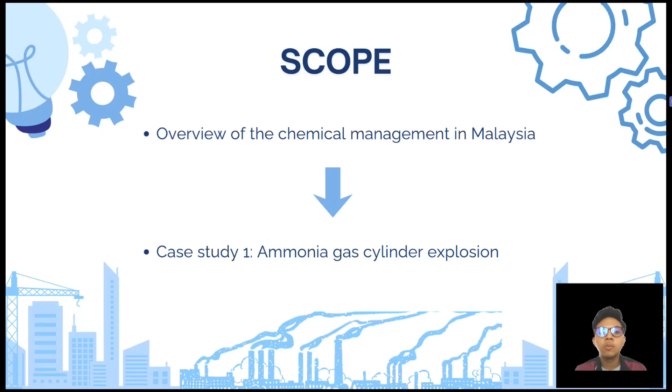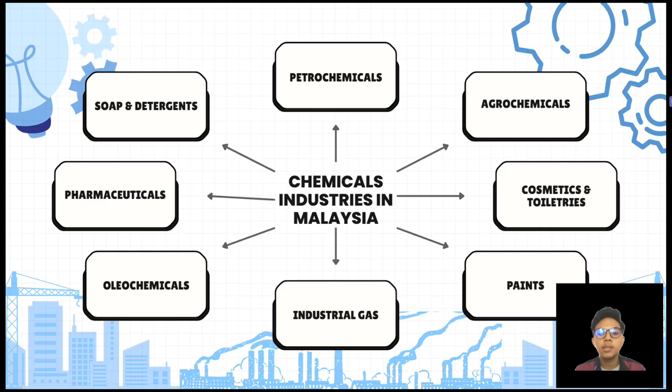This is our scope of case study: ammonia gas cylinder explosion. There are 8 chemical industries in Malaysia. The 5th point is our incident. It's an industrial gas. Case study 1.

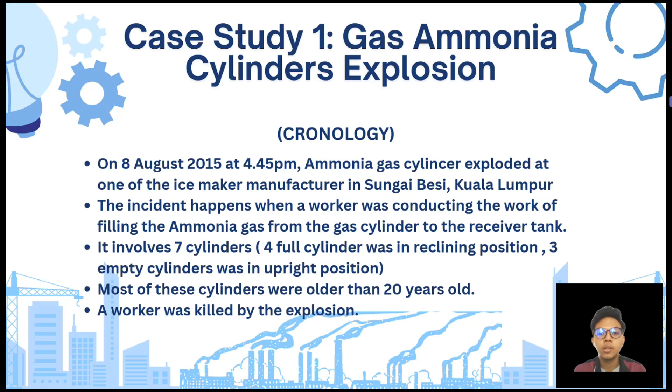Gas ammonia cylinder explosion, the chronology: On 8 August 2015 at 4:45 p.m, an ammonia gas cylinder exploded at Sungai Besi, Kuala Lumpur, Malaysia. It involved 7 cylinders, 4 of which were in a reclining position. Most of the cylinders were older than 20 years old, meaning they were expired. A worker was killed by the explosion.

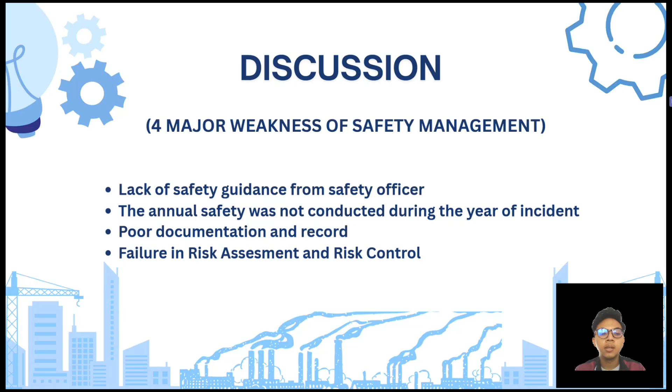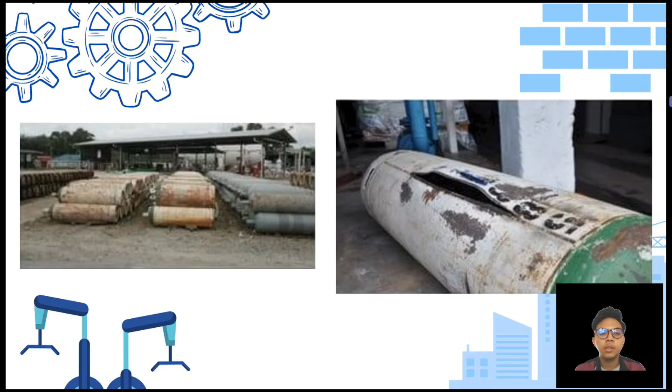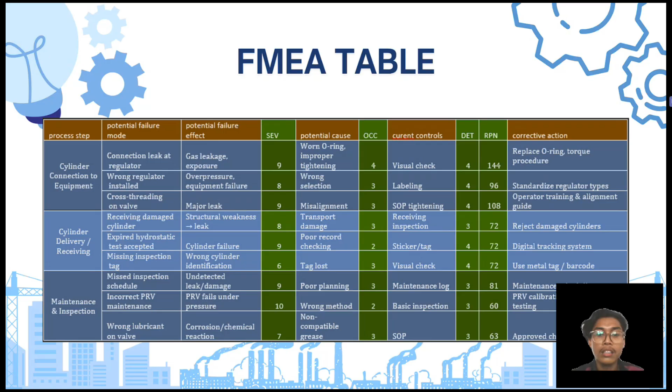Overall, the highest risk we found is during equipment installation, where wrong fitting can lead to serious leakage. This area needs the most attention.

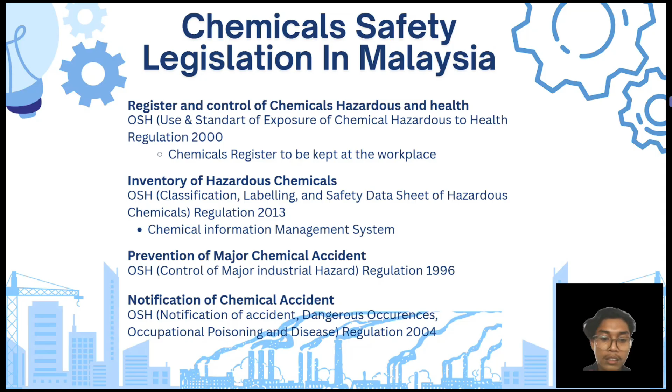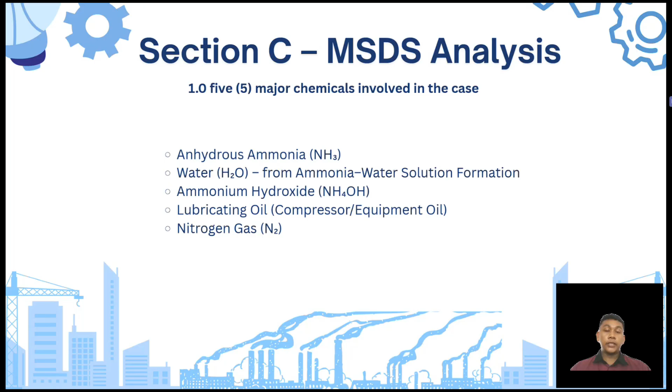First, anhydrous ammonia. Second, H2O from ammonia water solution formation. Third, ammonium hydroxide. Fourth, lubricating oil for compressor equipment. Fifth, nitrogen gas. This section covers the official MSDS safety data sheet for each chemical.

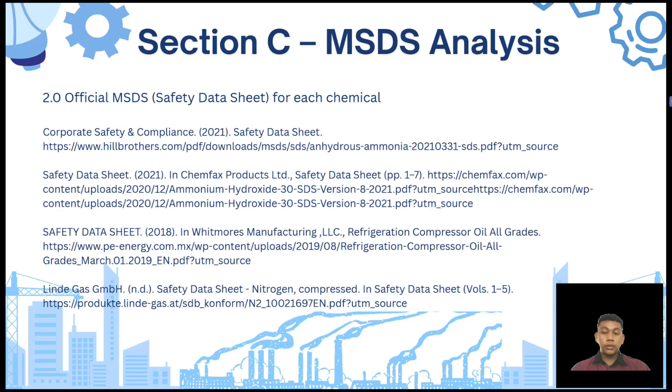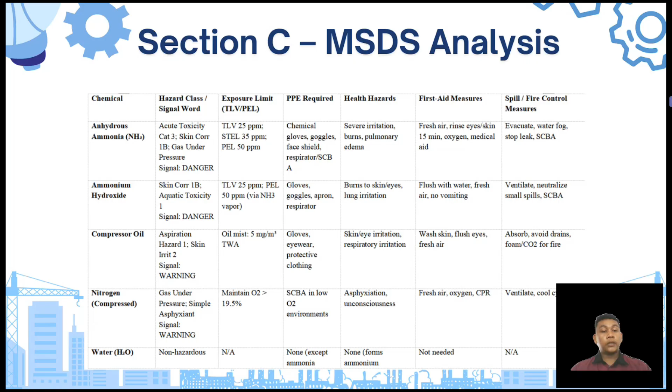Section C, 3.0 MSDS analysis. This covers the chemical hazard class, signal word, and exposure limits for the 5 chemicals: anhydrous ammonia, ammonium hydroxide, compressor oil, nitrogen and water H2O.

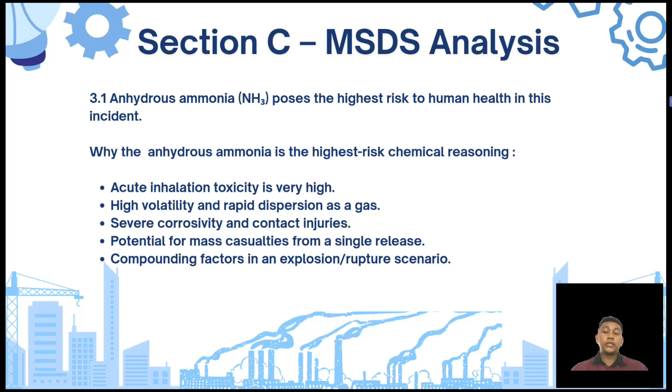Section C 3.1: anhydrous ammonia poses the highest risk to human health in this incident. Why is anhydrous ammonia the highest risk chemical? The reasoning is: acute inhalation toxicity is very high, it has high volatility and rapid dispersion as a gas, there is potential for mass casualties from a single release, and it is a compounding factor in explosion-rupture scenarios.

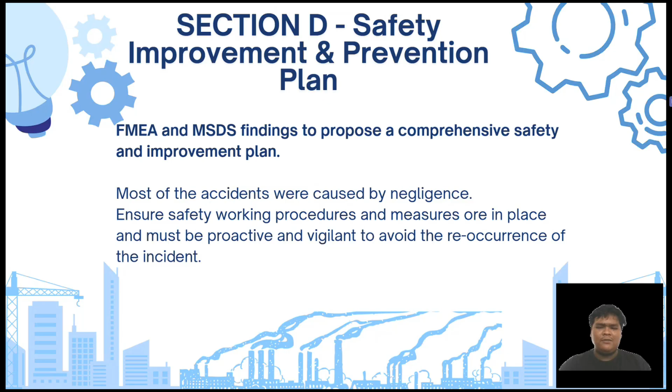From the FMEA assessment, several important findings were identified. First, high risk failure modes were identified. Second, root causes include human error, poor inspection, inadequate ventilation, and material degradation. The most critical RPNs relate to cylinder connection, storage, and maintenance.

Second, key findings from MSDS: hazardous chemicals include ammonia, ammonium hydroxide, compressor oil, and nitrogen. Main hazards are toxicity, skin irritation, and fire explosion risk. Required controls include proper PPE, ventilation, spill control, and emergency first aid.

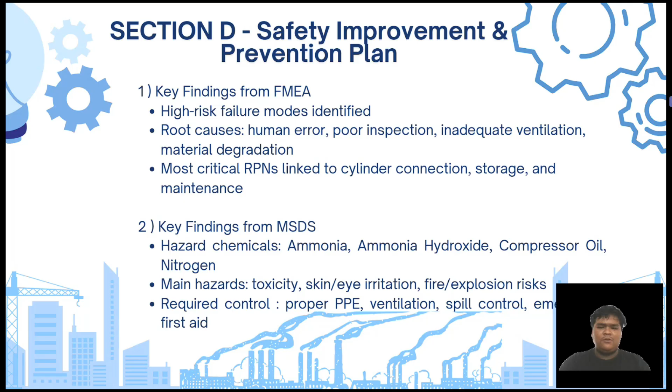Our safety enhancement plan consists of several layers. First, engineering controls: install fixed gas detectors, improve ventilation in storage and mixing areas, and upgrade regulator, hose and valve systems based on FMEA findings. Next, PPE improvement.

Respiratory protection in confined or poorly ventilated spaces. Second, chemical resistant gloves, goggles, and apron for ammonia handling. Last, flame resistant clothing for hot work.

Last, administrative controls: strict SOP for cylinder connection and maintenance, scheduled inspection aligned with FMEA high risk points, and hot work permit enforcement in fire risk zones, with PPE improvement.

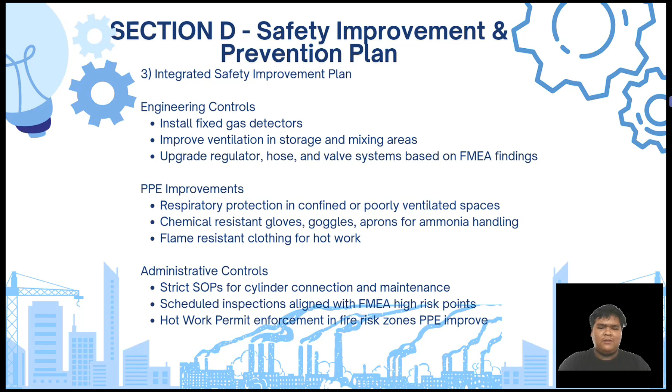We also strengthened our emergency response measures: spill kits located near high-risk areas, updated evacuation plan for ammonia leaks, and clear labeling with MSDS sheets available.

We also strengthen our emergency response measures: spill kits located near high-risk areas, updated evacuation plan for ammonia leaks, and clear labeling with MSDS sheet availability at all workstations.

So far, the expected outcome is that the safety improvements have reduced the likelihood of high RPN failure and lower worker exposure to hazardous chemicals. This action also increases overall safety awareness among workers and ensures better compliance with industry safety standards.

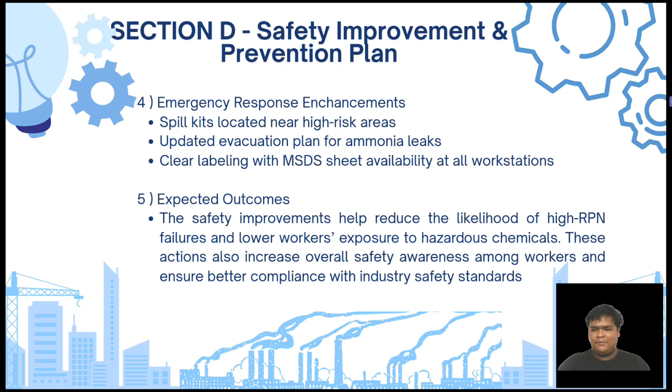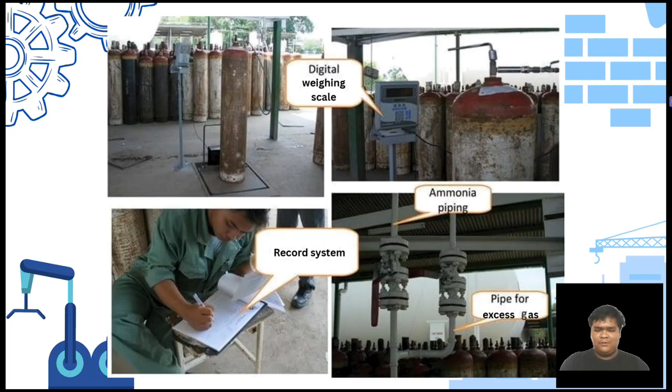In conclusion, most of the accidents were caused by negligence. Ensure safety working procedures and measures are in place, and workers must be proactive and vigilant to avoid the reoccurrence of such accidents.